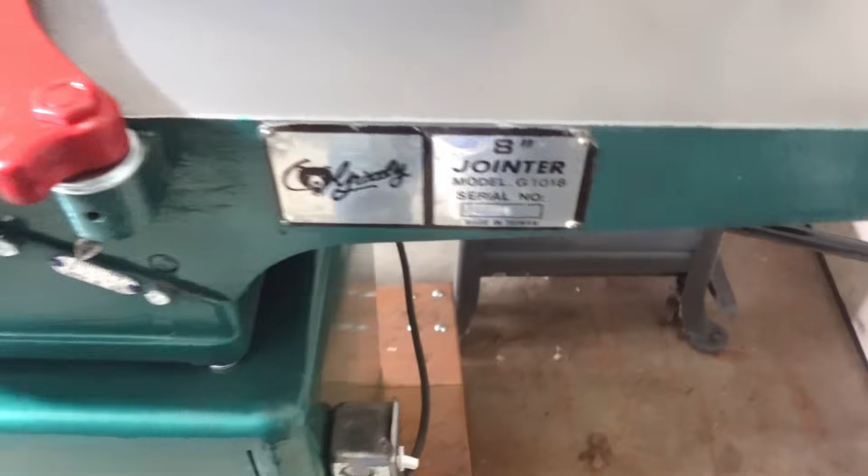All right, so this one, what we're doing here is really different for me, but whatever. I am restoring this 8-inch Grizzly jointer, and it did not come with a cutter guard or cutter head cover. So what I'm doing is making one from scratch. This one is made out of wood, but it'll serve the same process. So let's get into that.

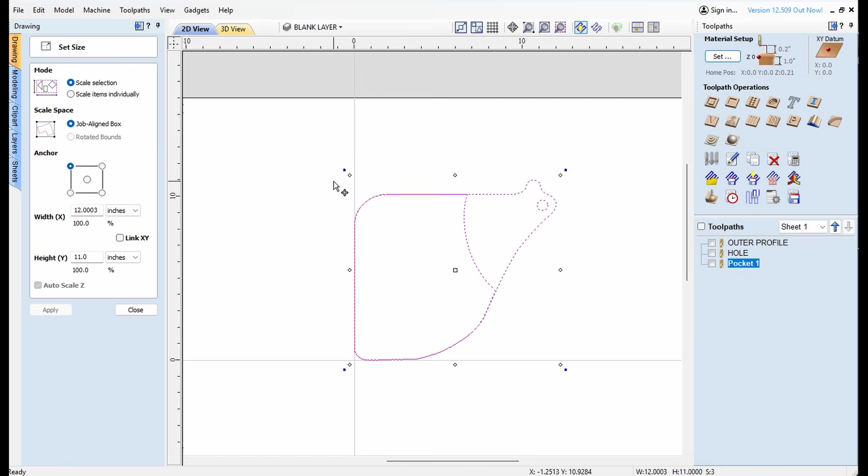Note where our 0 is down here. I did that just for ease of use. I'll show you something else here. If you look at this thing, it is about 12 by 11. It's about 12 this way and about 11 this way. A little over 12, 3 ten-thousandths. Okay, so that's the size of piece we're going to need.

And I know that I have a piece of 1-inch plywood. You're saying, wait a minute, 1-inch plywood? Yeah, I don't know where I got it from, but it's two half-inch pieces that are glued together. That's plenty big for this piece, so that's what I'm going to use. It's about 1 inch thick. I could use hardwood, and I have used hardwood on some 6-inch Deltas and stuff, but plywood's just a little more dimensionally stable. So I kind of wanted to do that.

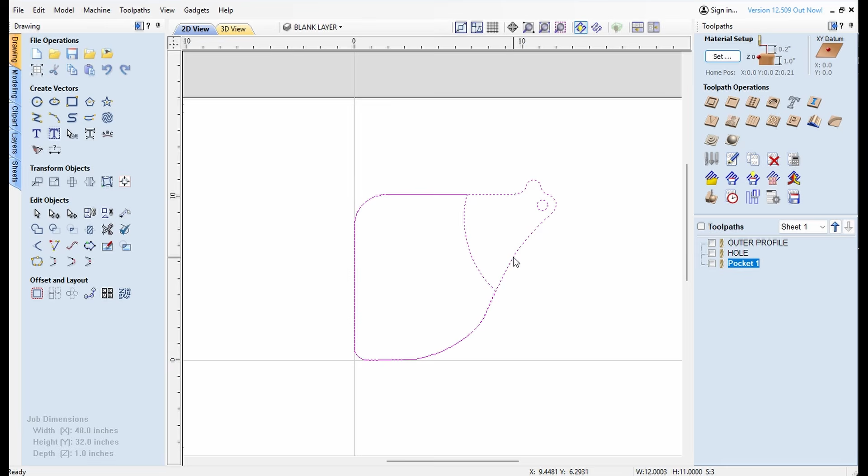All right, so let's look at this thing. Let's look at the outer profile first. Here we go. All right, and so outer profile. We're cutting it 1 inch, right, because that's how thick my material is. We're just going to go around the outside here.

Some of you may be wondering what this little thing is right here. I am going to put like an eye screw pointing down in here to connect an extension spring to hold the guard closed. Originally it came with a kind of a weird torsion spring, but since this isn't metal and I don't have the stops in there or anything like that, I decided just to use like a vintage Delta one does, and that is an extension spring. I'll have to drill a hole in the rabbet guide or whatever to put a little cotter pin in there, but that'll be it. All right, anyhow, 1 inch deep, we're going around.

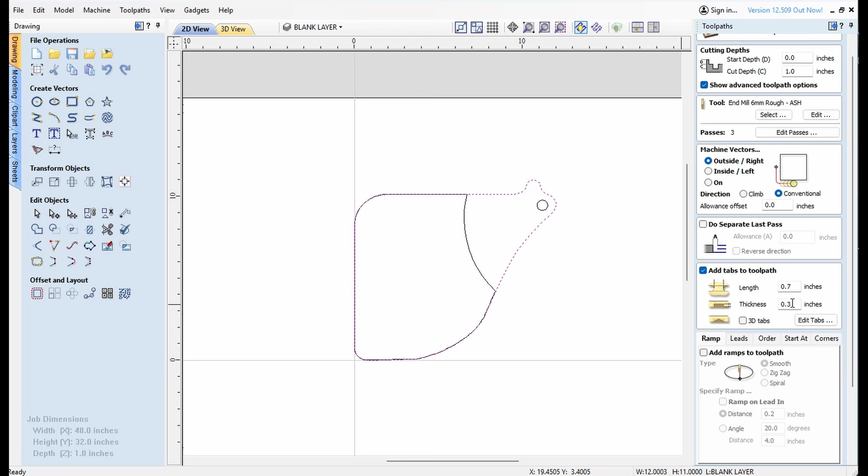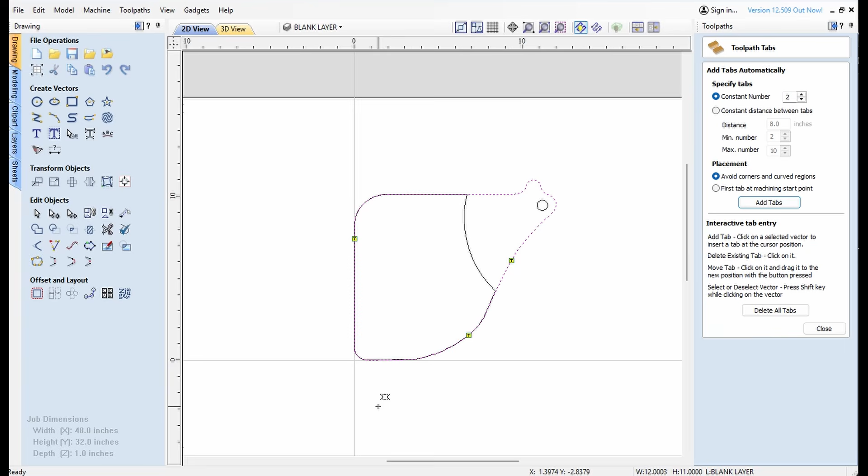I'm going to add some tabs here just so I can hold this thing. Those tabs look good. I'll edit them, add the tabs, and see where it puts them. Okay, so I'll put them there and there. That's fine. I probably want another one here. Yeah, let's put one there. Okay, all right, so that should hold it fine. I can hold it up here and I can hold it right here. So that's where I'll hold this thing.

Okay, so that is our outer profile. I always do that last because I want this thing as supported as I can, you know, until I cut that outer profile. So I'm just going to move that last.

Okay, now the hole. There's that hole, and we want to check the size of that. The hole in the support in the casting is 5/8 of an inch. So let's see how big this hole is. It's 5/8 of an inch. Perfect. Okay, and my plan is to epoxy a piece of threaded rod in there that sticks out, that will go through the hole in the casting, and then I'll put a little nut on the other end. I won't do it tight because it's got to rotate, but that's how I'll end up doing that.

So this hole, I don't want it to go all the way through. Remember, we're looking at this from the bottom. I could have it go all the way through—that's not that big a deal. But I'm going to go 0.8. Why 0.8? I don't know, because it leaves me 200 thousandths where it doesn't poke through, and I just think it'll look better.

Okay, that's still plenty of room for epoxy and everything in there, so I think I should be okay. All right, so this is the hole.

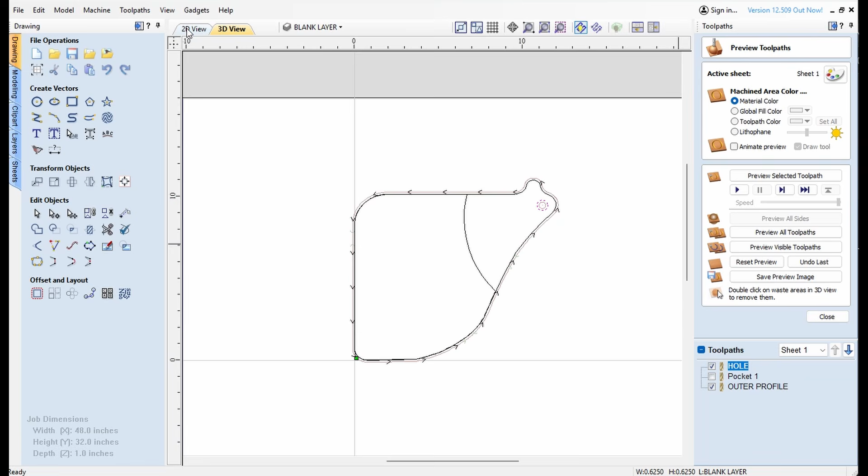Lastly, the pocket. What is the pocket? Well, the pocket is right here. Basically what I want to do is cut that about a half inch deep so it rests on this part on the table and comes up with a half inch clearance for the cutter head. And you're going, wow, a half inch, that seems like an awful lot. And you know what? You're right.

It probably is an awful lot. Matter of fact, I should probably change that to just 0.4 just to be safe, okay? And that's still a lot. Normally you're not taking over an eighth of an inch. Yeah, I want a little clearance there. It's still safe, you can't get your finger in there or whatever. So that's what I'm going to do, so I'm going to calculate that.

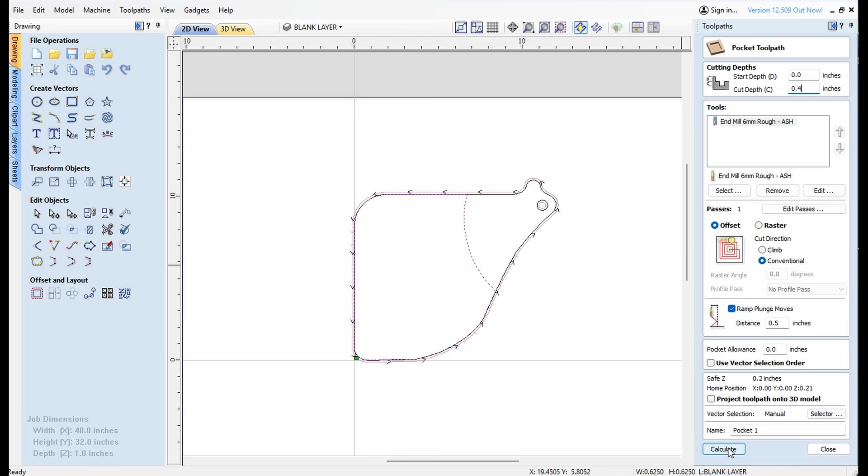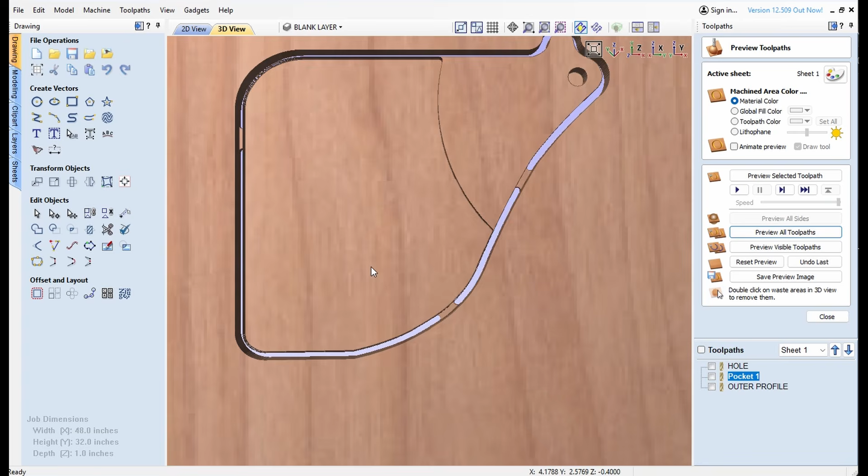All right, so now I'm going to reset the preview and preview all. Okay, so that's what it looks like. I got these tabs in here now, so I can't take away the outer material, but you get an idea. And if we look here, see, that's 0.4 inches, so this thing is unsupported out here, but it clears the cutter head.

All right, so I also know that the hole in the casting that this part goes into is down about a half inch. So what I'm going to have to do is stack some washers on this. That'll become clear maybe when I put it on the machine. But that hole is long, I got to stack them up, I got to stack up some washers so it's not resting on this, so it'll be resting on the washers.

But I think this is a pretty good design, I think it's going to work. I have done some for deltas before that are similar to this, so that's what makes me think it will work. I'm concerned about clearances here, I'm just guessing on a lot of that stuff. But once we get her on the table, we'll be able to see what it looks like. So with that said, I'm going to save the toolpath and then we'll go cut it.

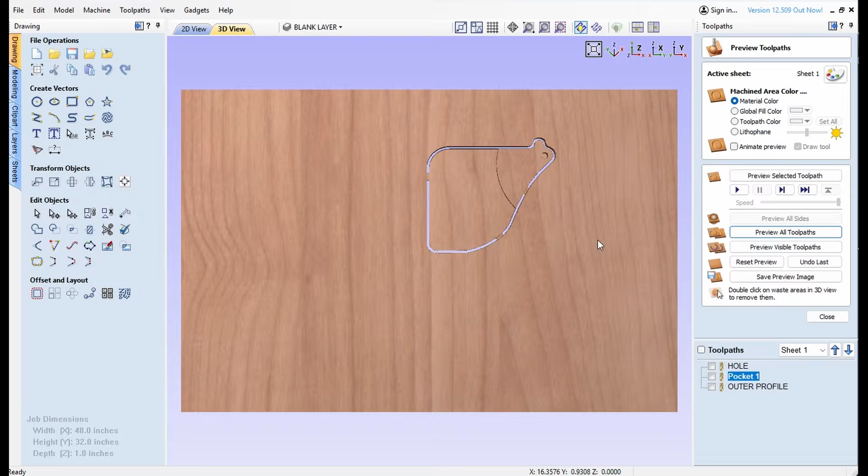Okay, so there you can see I have the program loaded up in my computer. And here I have the piece of wood that's just clamped down about where I want it, right? So what we need to do is tell the machine where 0 is. And as you recall, when we programmed this, we put 0 right down here, right?

So what I'm going to do is I have marked out approximately where the size of the piece is, just in pencil. And I'm going to put this guy right at the corner, and put him barely touching the top of the piece right there. And I'm going to tell my computer that's where 0 is.

Okay, so I just hit the 0 button on my computer, and it zeroed out all 3 axes. X is at 0, Y is at 0, and Z is at 0. So now the machine knows where the piece of wood is sitting in it, it knows what it needs to cut.

Let's cut it. So what I'm going to do is turn on my spindle. My spindle goes about 18,500 RPM. And I'm going to hit the go button. Run.

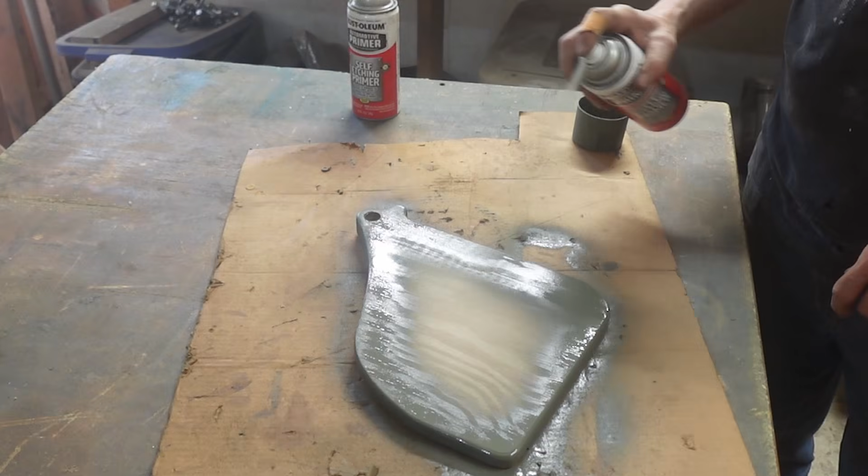Okay, so I have this filled here, and we'll hit her with a couple coats of primer, and then a couple coats of color. I'm thinking safety red, because safety first, safety always. I wish I had some high fill primer to kind of fill in that grain a little bit, but I don't, so it is what it is. Let's give this a chance to dry, and then we'll hit her with the color.

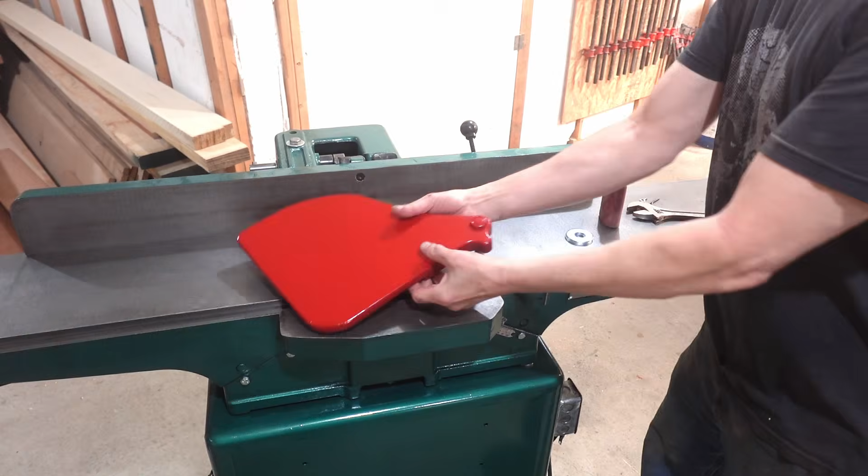All right, so paint's dry on my cover guard, and you can see I have the bolt just set through in there, it's just sitting in there. And then I'm going to put it right here, through these two washers. I went to the store, got the washers. All right, so all this should fit right down.

There we go. Okay, and then I have this other nut I'm going to put on the other side, and I'm going to put some blue Loctite on this one. You might recall I put red Loctite on that one. I'll put some blue Loctite on this one, just so these things don't back out, since they vibrate a lot when you use them.

Alright, now just put him on finger tight, right? I don't want him to bind when he's moving—see, he moves easily, but he doesn't come up and down. Tighten him just a little bit more, there we go. Very nice, that has a very smooth move.

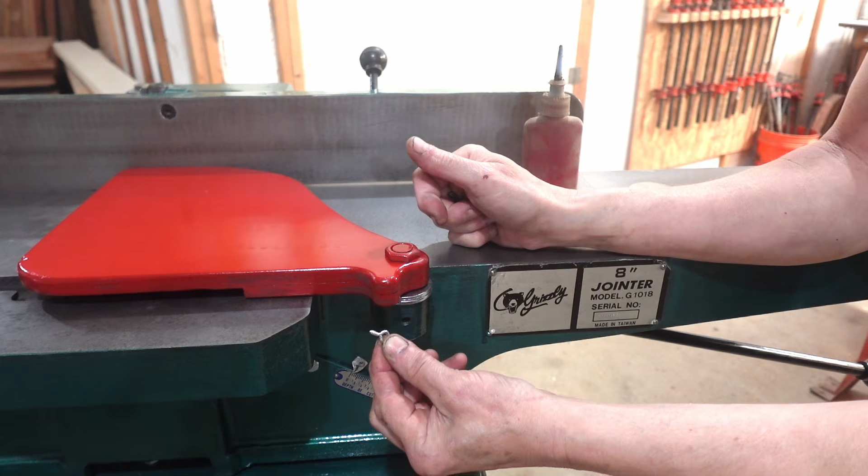Now I'll bring you in here and show you what I'm doing down here. So down here what I'm gonna do is take this itty bitty tiny little eye screw, you can see it there, and screw him in right here from the bottom up. And then I'm gonna take this cotter pin and drill a hole right through here so he'll stick out right there. Then I'm gonna put an extension spring between the two.

So there'll be here and here, and there'll be a spring that goes between them so that when I open this, it'll lengthen the spring and it'll want to close it. It'll spring shut every time for safety. That's basically how early Deltas do them. I'm waiting on the spring from Amazon, so it'll be a day or two, and I'll probably finish the video by then.

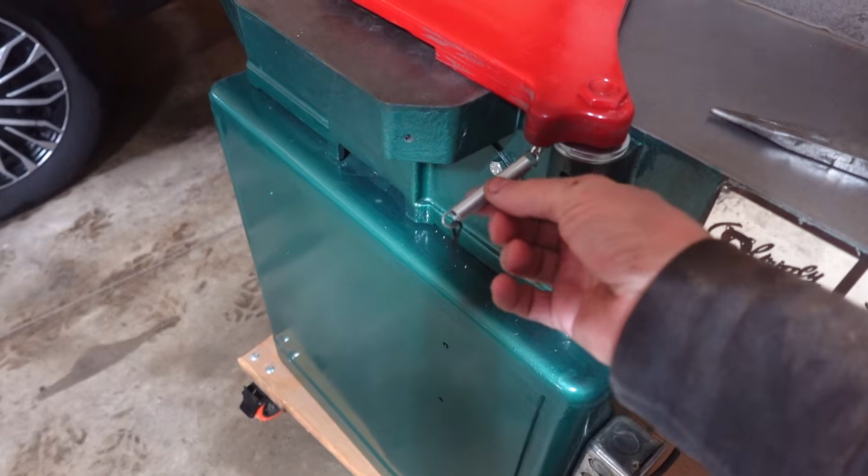But okay, so here you can see that I have that eye screw in there and the spring is on there, and here you can see I have the cotter pin there. And I'm just going to drill a hole right here to put that cotter pin through. There we go. So we'll insert this cotter pin into this hole here, and then we'll bend that leg.

Okay, I'm reaching behind there now to bend that leg. Hold her in there. There we go. All right, let's see how that handiwork works. Very springy. You can see down here, it stretches the spring and the spring keeps her closed. So when you push a piece through, it'll close afterwards. Works good.